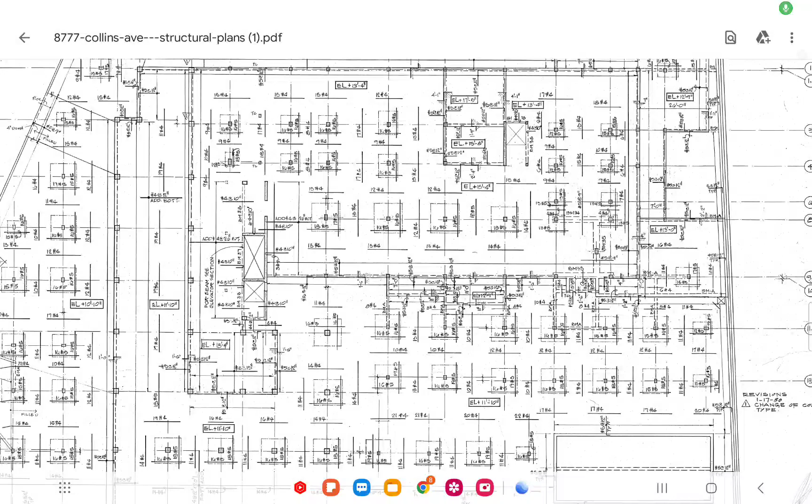Okay, so I've given out hints numerous times, but we're going to go back to shock loading. Shock loading, all right? And this should be your what? Your energy built up, your whatever it may be. But I want you to think about this: a hammer and a nail. What does a hammer and a nail have in common with

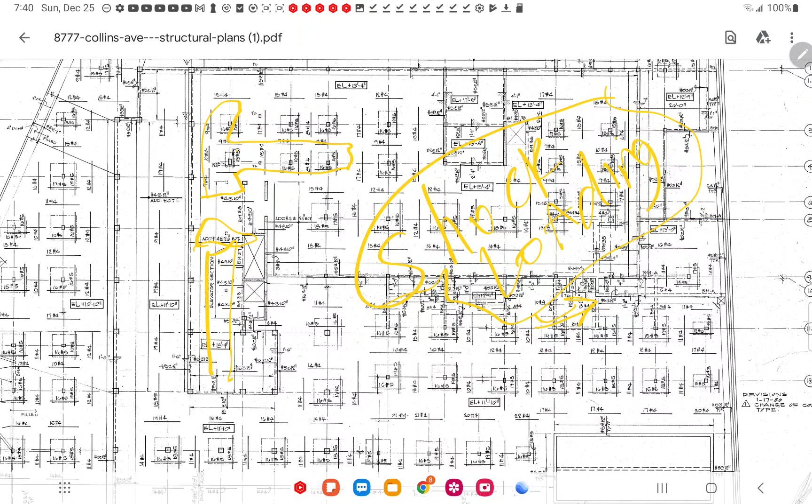this building failure? A hammer and a nail, and I'll tell you an M. What does it have in common with M? This is M. You can pause the video anytime you want and try to see if you can figure it out. I'll give you another hint before I reveal it, and that would be think of the video and think of what I always keep telling you about this video, is that I believe it was a

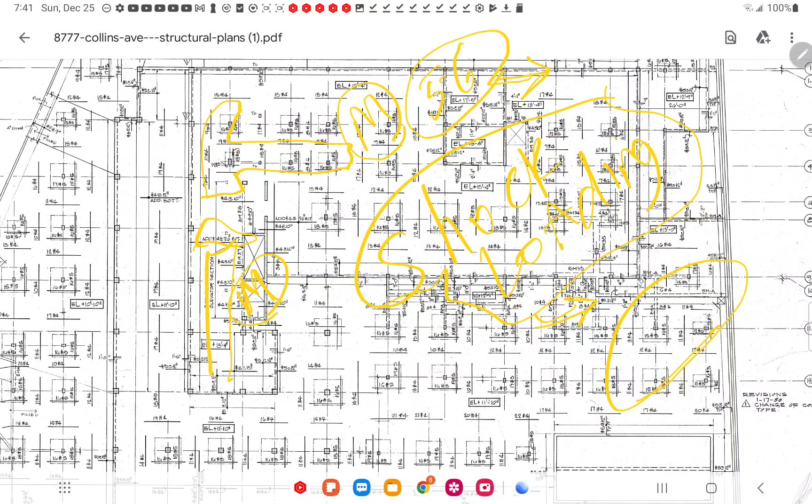full collapse. The camera went back, grabbed 5 or 6 seconds, whatever amount of video we're observing, and then it stored that onto the hard drive. Now, when we look at the video, most people look at the video, they see what? Pause this video and rethink about what I just said. If you want to try to solve it before I give it up, just pause the video.

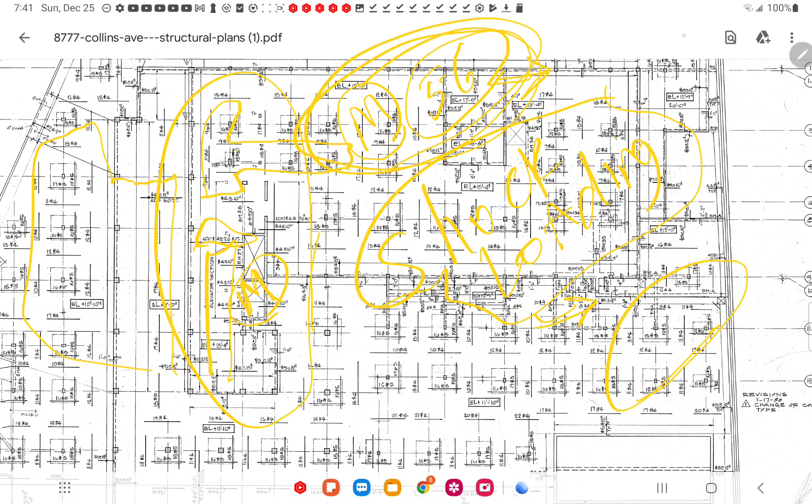All right, what is a hammer and nail? I'm going to go forward now. So what does a hammer and nail have in common? And then I'll go to the video last, the collapse, and see if you can catch on. I'm trying to give you hints before, so you can beat me to it, if you will. So this is K, L, M. Let's verify that. K, L, M.

Okay. This is very interesting. These are G's. You can see the shape of them, and they're signaled, they're identified. But this one is clearly like this. Clearly, not by mistake. It's on multiple of these drawings, these plans here. This is the one that goes up to the roof, floor 11. And then we transition to the penthouse, floor 12.

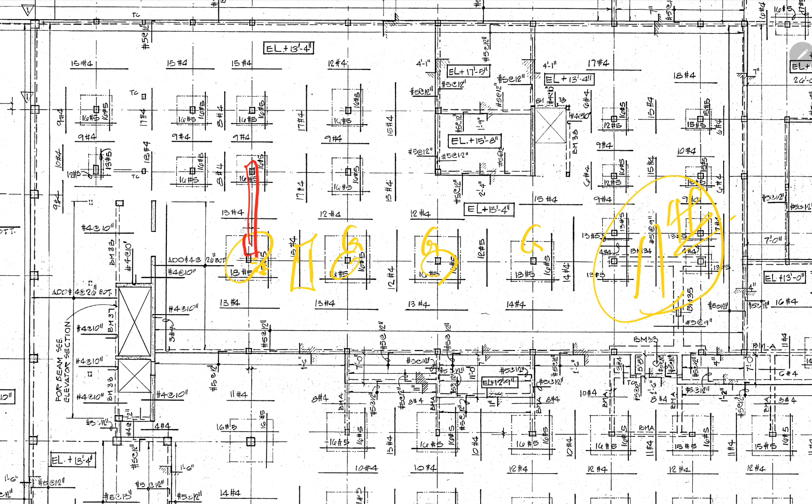But at floor 11, they do a transfer beam type setup. I believe it's something like this over to maybe there. And it's that one where we look in the sky view. If you look up there, where the air conditioners are, it comes through. Here's a walkway here, and we observe this. Top view, we see the beam like that, and then the one that goes across here. And then the walkway goes like this.

Let's see if I can get this right, so I'll have to go further out over there, make that a beam up here, and then cut across for the hallway, penthouse. And there's the air conditioning units here, here, and here. Let me show you. So we have this one here, I believe, is our plane. Here's the other column there. We're going to zoom in on it. I think the other one's back here. This goes here, and there's this beam set up like this. And then it has a column also.

Let's go ahead and zoom in. Let's rotate around a bit. Zoom out. And we look like we're in line with the G's. Remember, this one goes like this, though. All right, so that looks like our G. And this should be our K, flower pot, plant box. So that's our K line. So K, L, M. Then you come back to the building to find it. This is just a block wall where the windows meet, etc. So this is K. And then right between there is the other column.

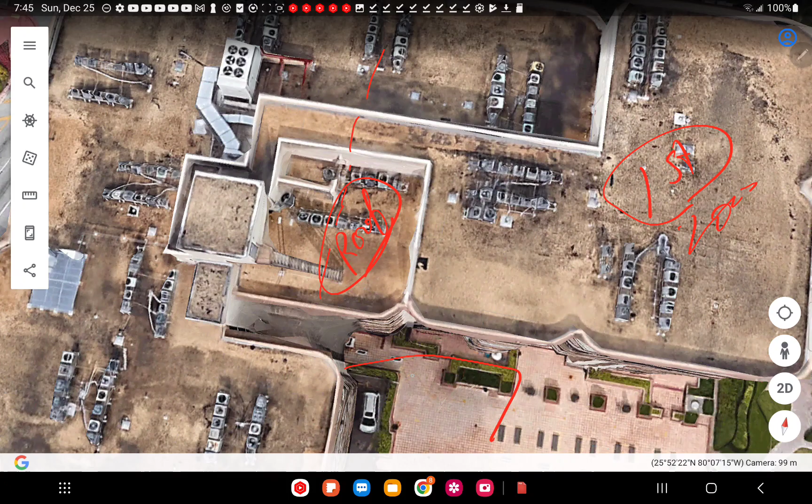So here's the fracture I'll be discussing. And I believe after the deck collapsed, it rattled the building and vibrated through the building. And the roof collapsed first after the deck. You're like, but nobody's saying that. Nobody's saying the roof collapsed first. So everyone's saying you clearly must be dumb, because here's M, and we see M buckle. Approximately maybe over here by N also, right? So we see M buckle.

Well, think about the hammer and the nail again. So this roof, I'm going to show with the cardboard. I don't know if I've already revealed it per the video part 2, or this will become part 2 and I'll move part 2 to part 3. I don't know yet. So when this roof goes down, it hammers this structure. This slab hammers the structure. It folds maybe down to here.

And that first initial impact that stresses this building, the load transfers to K, L, it's already on K, L, and M. M decides to be the one to take the impact, the load, the shock loading of the structure. And I believe it maybe incorporates some of this on that flip, the building when it starts rotating down. I have a video on that I've already posted.

I show this section below not buckling for some time in the video. And so it shows you the K and L. Huh. Yeah, that's L. That's the fake one. All right, so that's just a planter box there. It's fake. It's not on that line. It's not K column or L. And when I say K and L, I'm talking about the columns that are in here. And I just projected it out here to make it easy. Thank you for that.

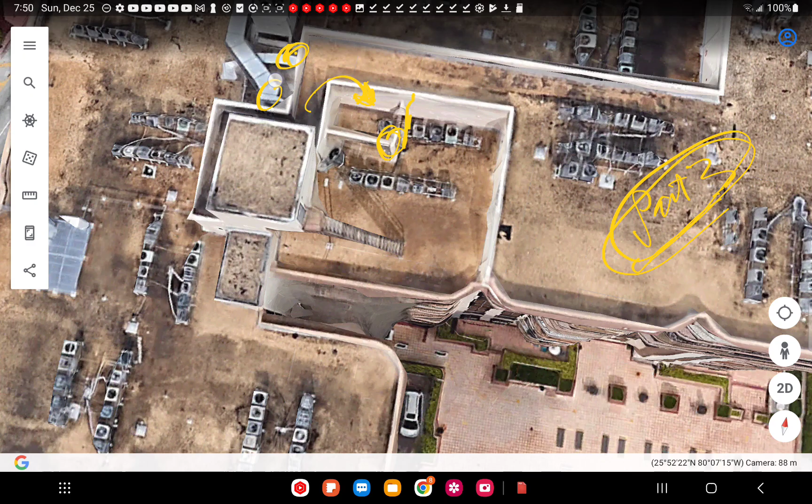So here's our rotation there. It's part 2. So then our rotation, and I'll show this with my cardboard demonstration. So this will be provable to you. This will be me trying to debunk myself, and you'll see that no, it's solid.

So when we look at it, we're looking at a video again, and they went back 5-6 seconds, and what we observe just happens to be the timing of the buckling around M, what appears to be buckling of some type over here, M collapsing. At the same time, we observe the roof going down. Well, just pretend that instead of 5 or 6 seconds, you could go back 8 seconds. You would see the roof go down, I believe, and then that hammer-nail effect driving down on all three of them. Turns out that M just got up for the task of taking that shock load, that hammer-nail effect.

So that's when we see it, that it looks like M driving down, failing at the base, and the roof coming at the same time. Just imagine if you could grab more seconds, go back in time, you would see the roof go down first. Impact driving, M couldn't take the multiple impacts of the hammer nail effect, if you want to think of it like that. It buckles and fails. To prove that, I would need more data on M, but we see M is collapsing.

Now, let me pause it and show you the video again, and now reimagine. As you look at this video, I want you to reimagine going back a few more seconds, and you see the roof go down first, rotation, and the multiple impacts. But this time, you then introduce this video, and it looks like, oh, what we observe, it's M. Well, when we do our math over there, it's M over to N. That's what's going. That buckled first, and then nobody's explaining the roof, why it's doing that. Well, I think I'm explaining the roof, the actions.

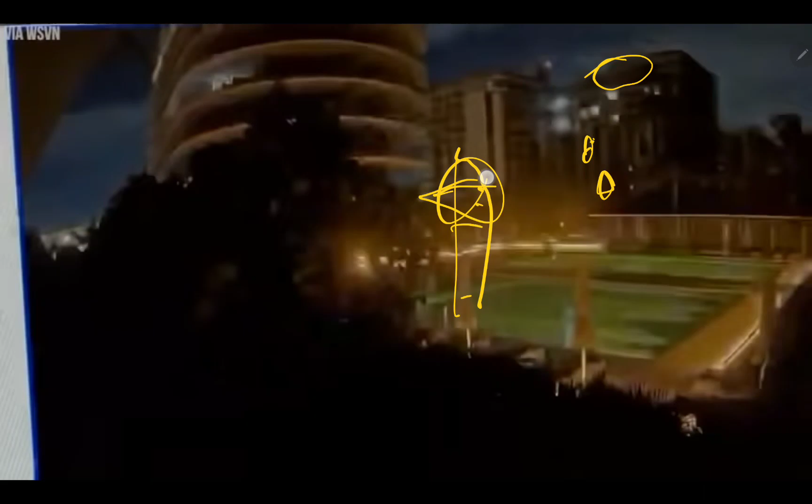Roof is failing. Ultimately, it's going to pull down the other structure to the right more. Start driving this roof, the roofing to the right, and the facade, the front plane, down also. And then we'll see a slight buckle eventually, right here, but only in the concrete here. And as you remember, these sausage links, I call them, they're pretty engaged. They didn't buckle. We don't see a buckle in any of the materials we find in the ground. We see floor separation. Let's go.

See, it's above. These guys are still parallel. They're still straight. So that's K, and that's L, I believe. It might be M. I mean, it really might be M. I might be off. K might be back here hiding out in the dust a little bit. I think that's the two windows, so I'm going with K. I'm willing to move, but that's K. The brickwork block in the middle, L, and M's back here. So these guys are firm.

And now a hammer and nail effect. Here we go. And we got some tearing going on, a lot of debris falling. And eventually we get that roof deviation. And then still, K is perfect. And then it looks like a little buckle between K and L of the block wall system, right where you may see it, right here. So this seems to be the roof, right? I said I'll get us into the building. Now look. Let's do it again.

So now I want you to remove your bias that it has to start at the bottom. I want you to pretend for 10 seconds you can go back in time. You would see the roof where it is now. You'd observe right now, because luckily we have it, that at K, L, and M the whole plane looks unbuckled. So we can't say it started there if you're looking at it now and you've got the roof structure already collapsed and you have no indication of lower collapse yet besides the pool deck.

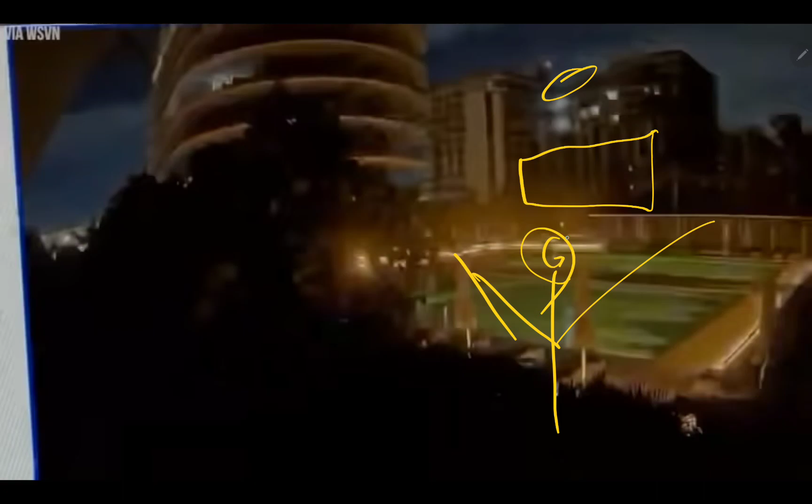So I'm saying it just rattled this guy up here, knocked the roof down, and that butterfly effect right there, based off that G one, and I'll show it to you, the G columns. I'll show it to you again, but this is what I'm stating. Let me let it play again, and I'll show you one thing before I terminate. You see, it's still there. Now there's the buckle, and that's what I see. That's how I'll put it together.

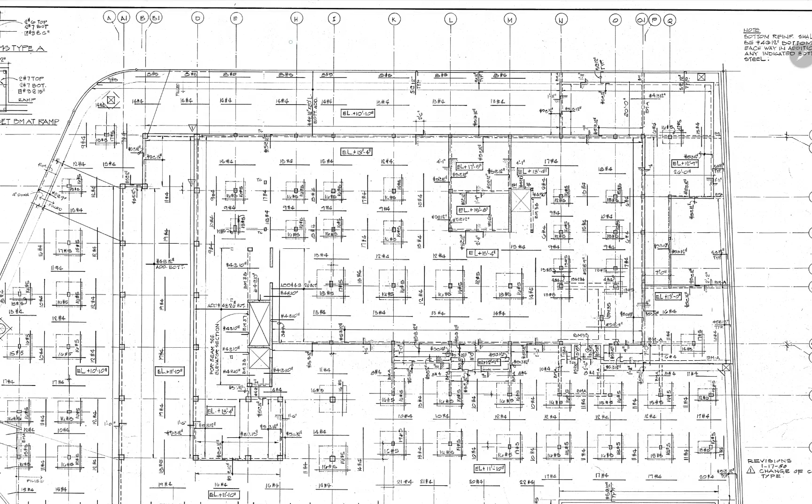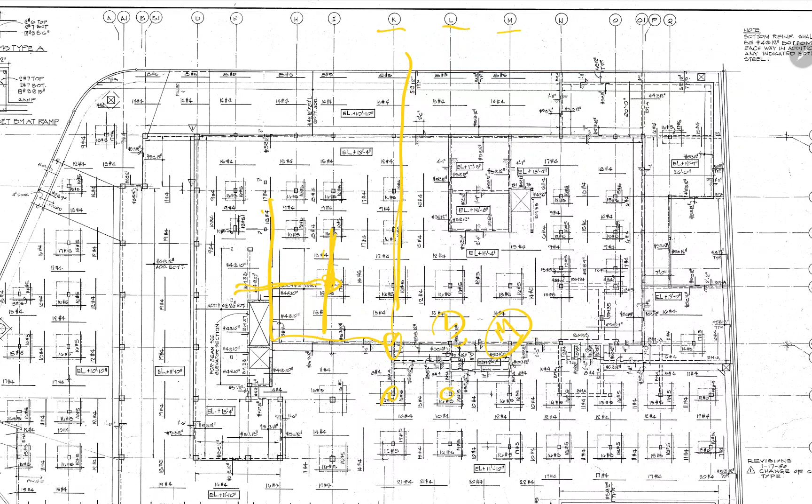So here's K, L, M. K, there's a planar box, L, and M. We see the video. We're into it a few seconds. The collapse has already started. I believe this G is probably what collapsed. That top part started the rotation down, and I can move it over to here a bit.

But I like it. I like it in the middle there. Also, what I find interesting is that he really punched out details on this, architect and engineer. If you see here, this is still G. G is supposed to all be the same. I'll show it to you. He put 16 fives here. He put 17 fives there. He put 16 fives here, so these two are the same. 16 fives here, the same.

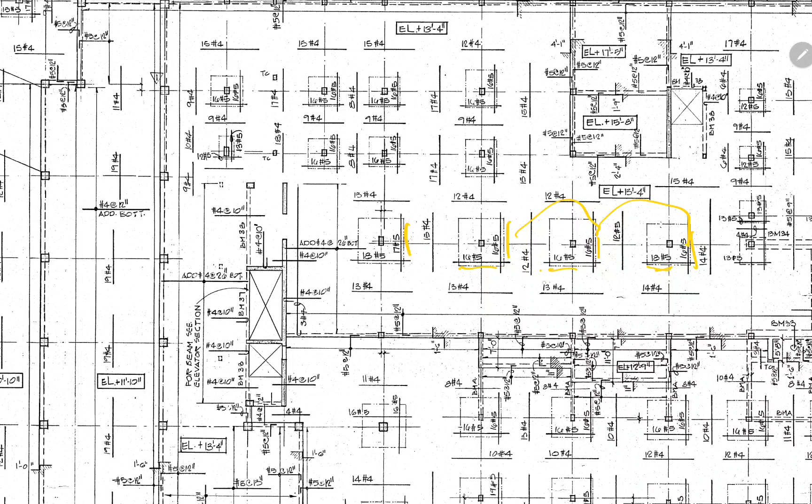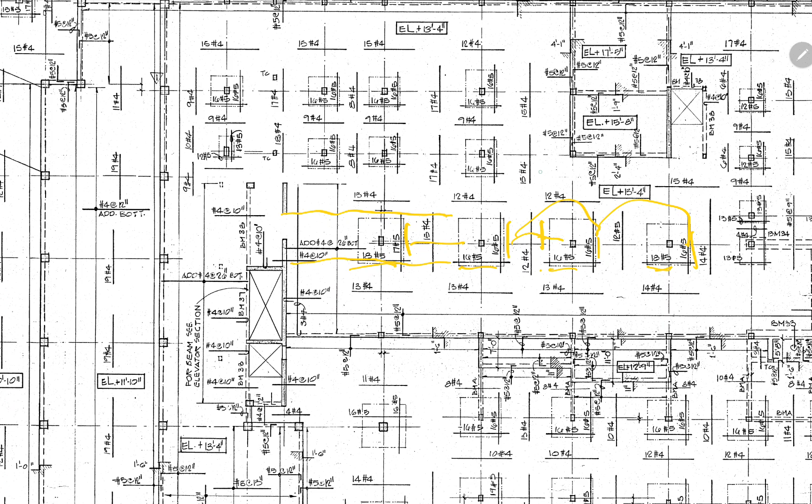On this one down, he put 18 fives. But these two in the middle, this is L and M, 16 fives. So these two, same. These are not the same. These are 18 fives. So he went up by 2 in this direction. In that direction, he went up by 2, and in the other direction, he went up by 1. And so, let me think, well, if I knew the spacing here between these two, I'd be able to tell you which way he chose. So, it went up by 1 this direction. This column, I don't see it changing.

But our rattling, we could get the punching shear through. So this is the outer deck. Right, that's where it's connected. And you see what I just drew, right? You see how bad it looks. Let's do it again. So I'm going to do our connections. And in the middle, I'm going to put this one, hold on. And we'll change that. Let's do it again. I'll do it in this color. So now I want you to see

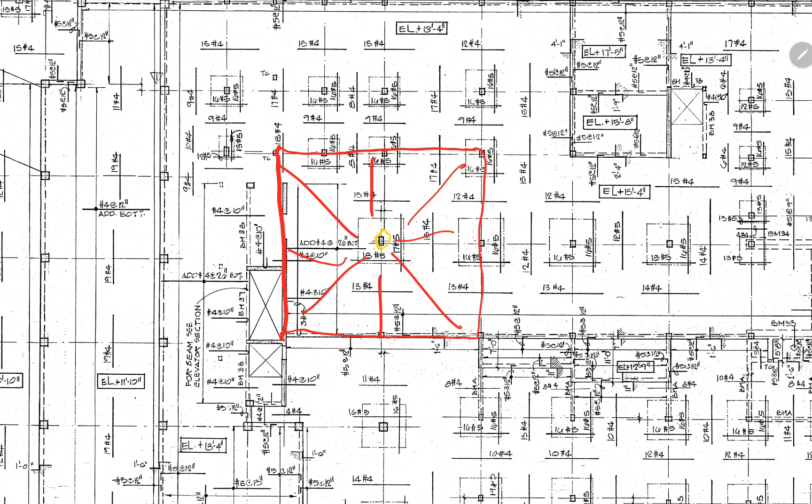that our entire span there, the tributary areas loading onto the top deck, are loading onto column 1. This 1G. 1G. Now, this is significant, this wall here. Remember, the cantilever effect, as I call it, allows for a lot of bracing. And in fact, when it fails, we do see a lot of floor system left behind. Right about there. So, this is where it's fractured from here. So let's look at it as a cutaway.

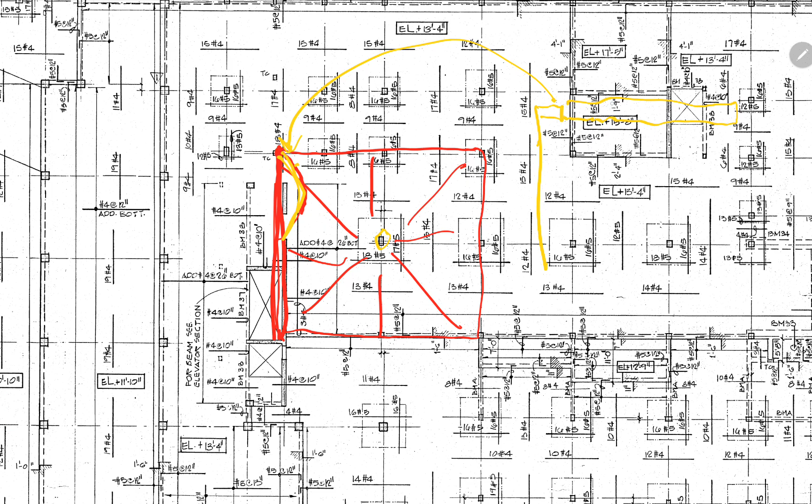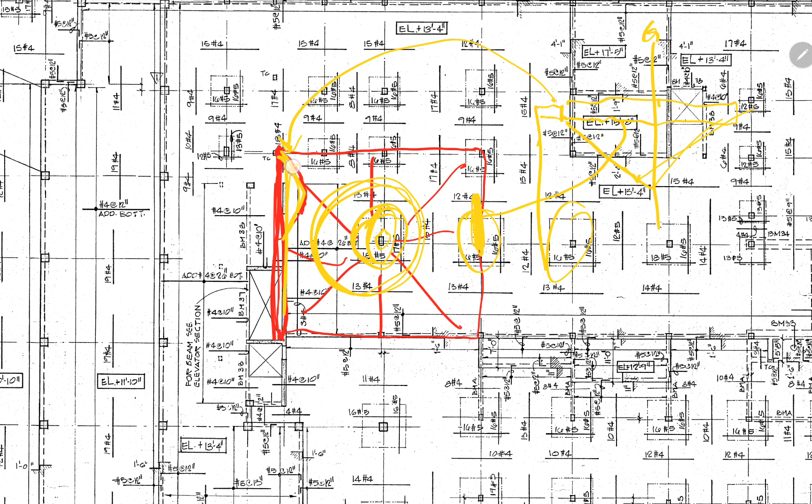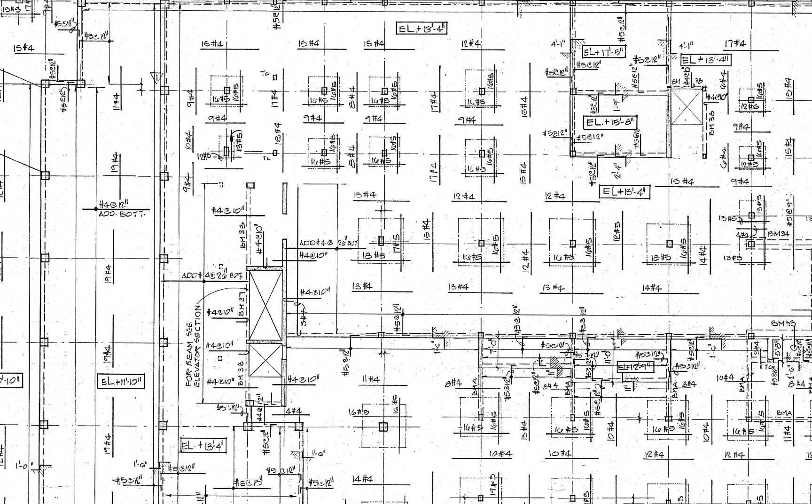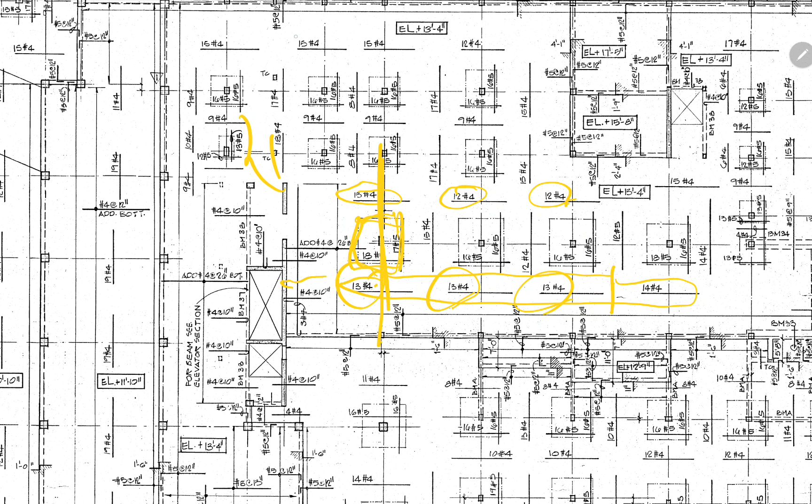And I think he would have, for a gate, for engagement. Sorry, I'm looking at his other note there. I'm going to zoom in and out for a second there. Okay, so this is where I believe we get some punching shear going on, but it develops itself like that in the butterfly effect. And I'll show that because of the ductwork. That's part 2. And then I'll do the model, part 4, I think.

So it looks like here, let me zoom this in for you so you can see the columns first. So I want to show you the column here, here. These are columns. This is the wall ledger system, and so I'm going to come back here. This is where that fracture exists. It stayed. Oops. So let's take a look at that again. I'm going to draw you in like this. I'm going to come across. I think it's over to here. Go like this, and I'm going to come back across.